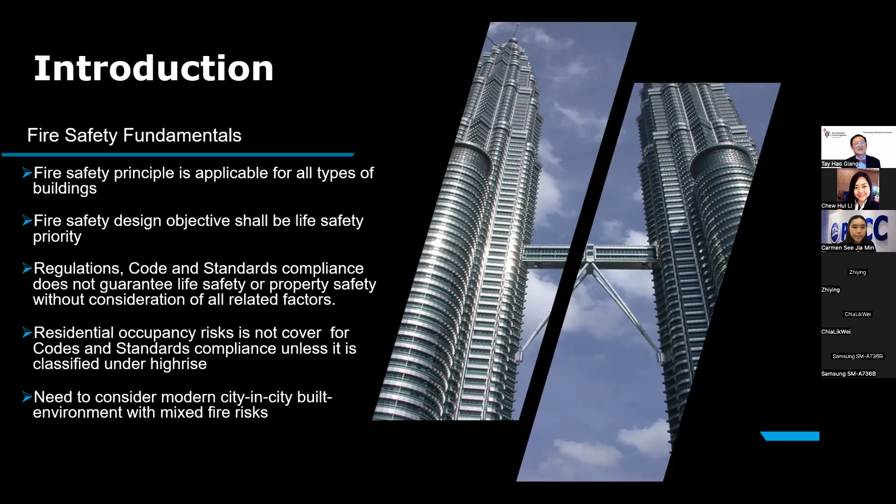Residential occupancy risk is also not covered by codes and standards. And if you look at nowadays, we're building higher and higher residential buildings, especially condominiums or apartments of 20, 30, or even 40 stories now due to land costs. Imagine if all these occupants were children and senior citizens asked to evacuate high-rise buildings. What are the implications? We also need to consider the modern city-in-city built environment, because there are different fire risks and fire hazards. And we have already experienced within Klang Valley many incidents whereby gas leakage in the eatery area caused explosions that affected the shopping mall.

Prescriptive design is what we have been following for decades, but not necessarily the best design, because nowadays we also have performance-based design for modern high-rise buildings and mega-sized shopping complexes. We are also looking at very huge transport hubs like our airports. What about sports complexes and what they call public assembly and worship places, like mosques and churches?

Prescriptive design is deemed-to-satisfy design parameters, which means that if you follow the codes and standards, the building you design is safe. But a lot of fire incidents around the world have proven that that is not the case.

One reason is that a lot of these codes, standards and regulations were written and established probably about 80 years ago. At that point in time, there were no high-rise buildings, our population was not so dense, and the risk and hazard was not as much as today, because we are dealing with a lot of synthetic materials that have higher combustibility and burn ferociously, creating fire propagation at a speed never seen before, especially plastics.

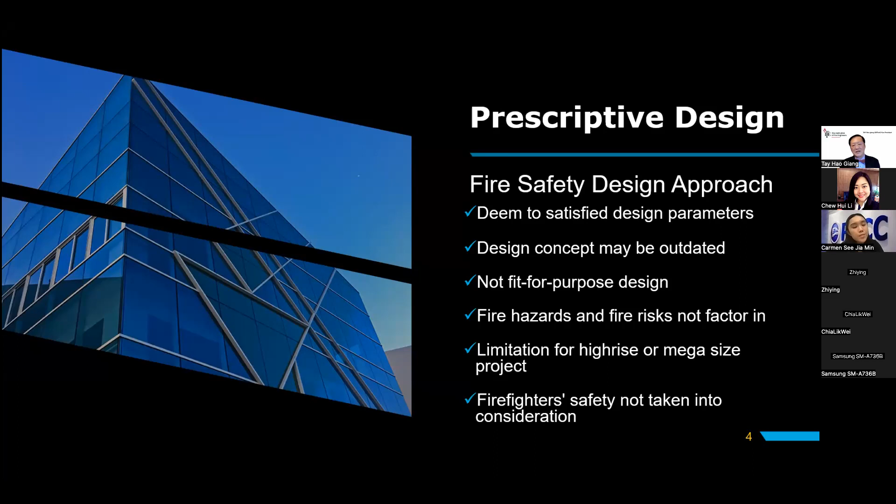And there are limitations for high-rise or mega-size projects. Our building regulations are not catering for extra travel distance or extra height. Plus, building regulations also do not cover firefighter safety. Imagine, when a building is on fire, all the occupants will be evacuating. But who actually spends hours in the building? The firefighters who are entering. So are we protecting the lives of firefighters while they are trying to save our lives and property?

Because a lot of assumptions and personal opinions have been taken into designing or assessing whether a building is safe or not. This particular building is an old building. Of course, at that point in time, regulations were not properly established yet, but still, we cannot excuse why adequate or appropriate fire safety measures were not subsequently introduced.

This building is situated in a very prestigious area within London, very near to Princess Diana's Kensington Palace. As the building is very old, the local council decided to refurbish it. They spent something like £16 million, but ended up spending nothing on refurbishing the fire protection system. Fully non-sprinkler protected, no fire detection and alarm system, and the passive protection is grossly inadequate.

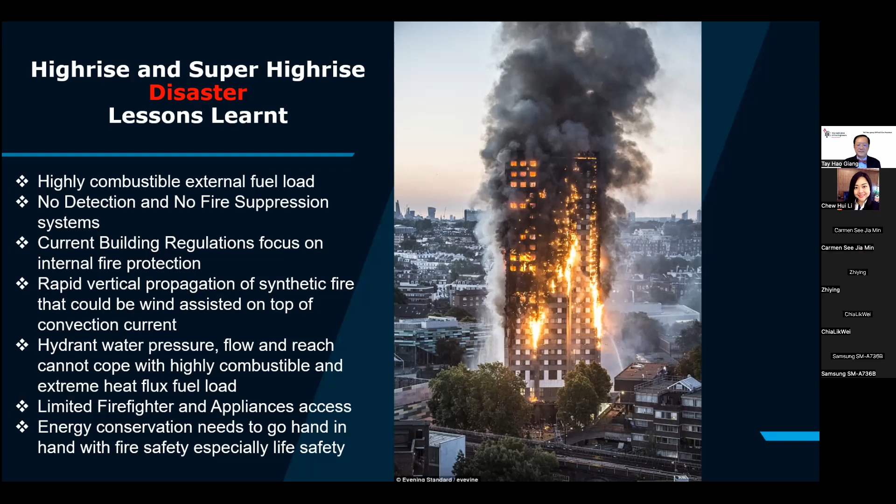Everything else within the building was fully burned, despite the building being equipped or renovated with double glazed windows. Double glazed windows have proper insulation properties, and you can imagine the ferocity of the fire caused by the external cladding. You see, when we talk about green, I always stress that green must be truly green. If it burns, it becomes brown.

Now, what happened in the Grenfell Tower disaster, as well as a lot of other high-rise buildings in Dubai, is that they go for green. So in the UK, they try to save energy by using insulation materials on external cladding, up to 6 inches of polyethylene foam. They are light, cheap, and easy to install, but when the fire started, it burns like a torch.

In Dubai, it's just the opposite. Because the weather outside is so hot, they use high insulation material to reduce the air conditioning bill. And there are so many high-rise fires in Dubai, even until today. There was another one yesterday, all right? So you can see that everything inside the apartment is burned. Nothing is left behind except concrete or brick or metal. You can imagine the ferocity of the fire.

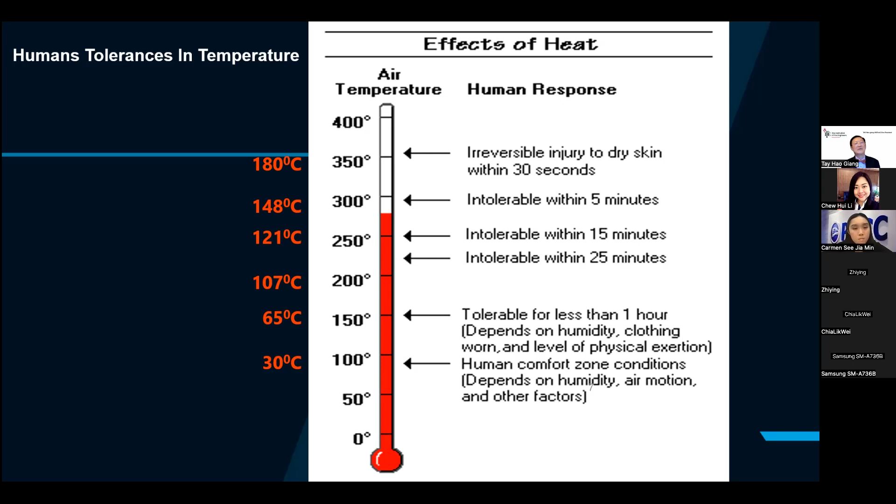But the question is, what is the temperature of normal fire incidents? It can range between 400, 500, all the way to 1,200 degrees C. If you happen to be in a fire of 1,000 degrees C, you will disintegrate and disappear, evaporated. You'll be declared missing in action.

Again, both of these were caused by external highly combustible cladding. All right, so around the world, so many cities make the same mistake, going for green, and at the end have to pay a very hefty price.

Now, when this Address Hotel fire happened, it was such a coincidence that it happened on New Year's Eve. Normally tourists flock into Dubai on New Year's Eve because Dubai always has a firework display that attracts a lot of tourists. But on that New Year's Eve, all the tourists got two shows, one live show and a firework show. My friend, who was a fire chief at that point of time, told me it was hell, you know, because he had to deal with evacuating the residents as well as controlling the crowd.

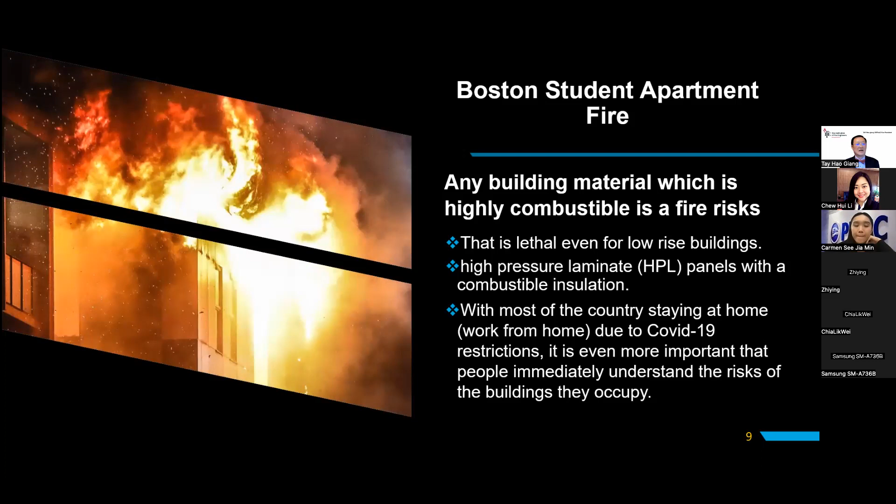When you see a fire incident, what do you do? Instead of evacuating, everybody moves towards the fire, tries to take photos and videos, and they go viral on social media. So you see, if we do not take human behavior into consideration, you cannot claim that you designed a building safely, even though your fire detection alarm system complies with codes and standards. All right. Fire, again, if you look at the color, I don't have to tell you. It's ferocious.

So whenever you have a fire, the fire could break through this particular gap and then spread. And worst of all, it is now guided by the glass panel, and then many of the floors above will be affected as well.

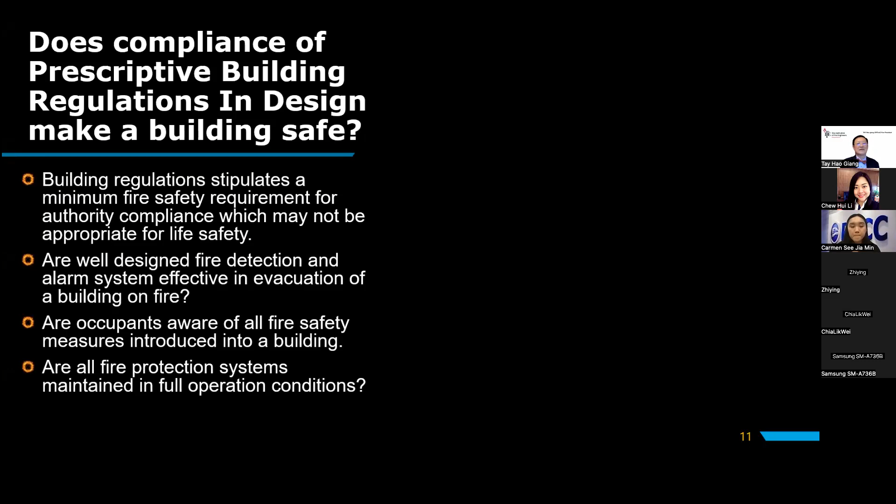So building regulations stipulate a minimum fire safety requirement for authority compliance. And that is where a lot of designers base their fire safety norm on, which again, I think you have to assess the occupancy risk of the building, what it is used for, and how many people are going in.

For example, my friend, an engineer, told me, wow, this building, 6 stories, I designed everything according to codes, standards and regulations. I said, are you sure it's safe? He said, yes. I said, but I don't think occupants can evacuate. He said, why? I said, you designed the alarm bell, but this is the headquarters for the association for the deaf. You have the alarm bell, but deaf people can't hear. So is it safe? So you see, there are a lot of considerations to look at the eventual application of the building against what is being designed.

All right. Prescriptive code, I'm not saying that you can't use it. Yes, but we cannot stop at what is listed inside that document. A well-designed fire detection alarm system is effective in the evacuation of a building on fire. I can talk about this for probably the whole day. This is a very, very important topic, because this is the first line of defense in any building.

The system must be able to pick up fire at the earliest stage and then raise the alarm to make sure that people evacuate. If it fails in its purpose, then you know that we're going to have a problem. But there's more to it, because you've got to actually incorporate acoustic engineering. You've got to understand, because you're looking at sound traveling through the air, entering a human, using the ear to detect the sound pressure level. I won't go into that because I've got no time for it today, but perhaps in future.

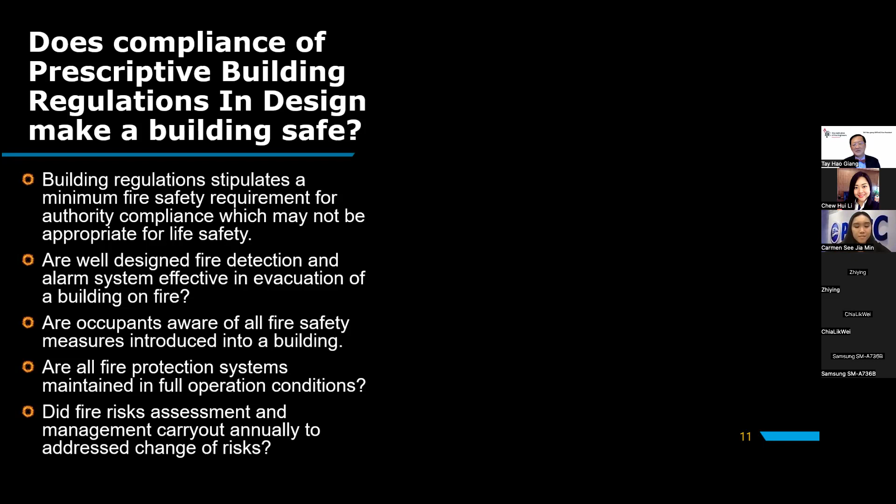And yet we are building taller and taller buildings. Look at all these tall buildings. I was taken on a technical tour of this particular building all the way to the top, and I tell you, they have quite good preventive measures. They even have mechanical floors whereby the water tank can be used to flood the floors below if the fire gets out of control. This is 452 meters. Let me ask all of you a question. 452 is about 160 floors. Can you walk the staircase down in one go during a fire drill? You can't.

So you see again, human behavior and human physical limits are not taken into consideration. Except in Malaysia, we are very proud because the Petronas Twin Towers happen to have a sky bridge linking the two towers at only 41 floors. Tower 2 is on the left. If a fire happens on the lower levels, up to the 41st floor, everybody will be asked to go into the staircase and evacuate. But from the 41st floor onwards, everyone will be asked to come down to the sky bridge if the fire is confirmed, cross over, and be taken down by high-speed lift. So it's mechanically assisted evacuation. But how many commercial buildings actually go deep into establishing ERP, ERM, and ERT?

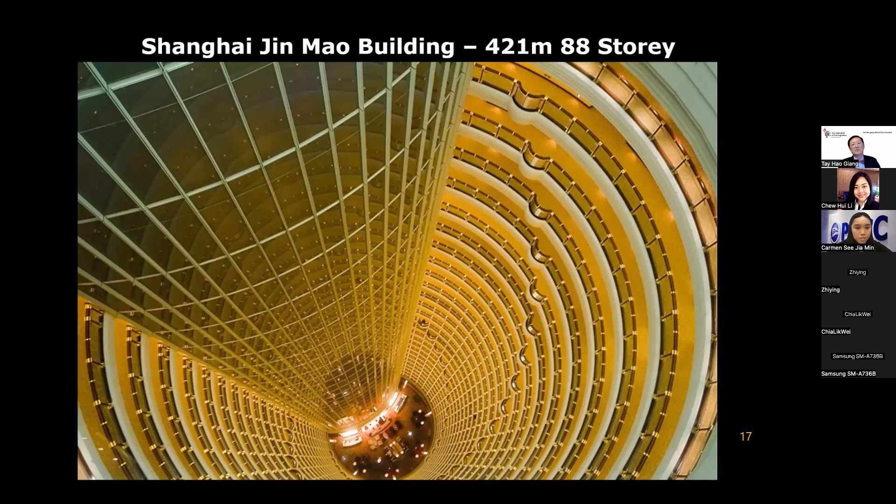Look at the hotel. This is on the upper part of Jin Mao building, and you can see that internally it's actually empty. The bubble lift going from, I think, 46th floor all the way up. So if you have a fire in one of the rooms, I'm quite sure the smoke, everything will be spilling upwards.

Taipei 101. When I was taken up this building for a visit, I actually asked a question to the Taipei Fire Rescue Chief. I said, Taipei is famous for tremors. Why are you building so high? And then, of course, the consultant explained that this building is very stable. The upper part consists of 8 boxes with a narrow base that sit on top of each other. And at the base, it's trapezoidal, so the base is broadened, and the structure is actually double design compared to normal buildings.

Speed is very high. And what surprised me is that normally for high-rise buildings against tremors, they will have 2 water tanks on the top transferring water during the earthquake, to prevent oscillating of the building resulting in collapse. But in Taipei 101, instead of the water tank, they designed a steel ball 30 feet in diameter that acts as a pendulum.

This is another building in Dubai, 829.84 meters. This is the tallest at the moment, but in probably 3 years' time, it'll be replaced by a 1 kilometer building in Saudi. But the question I'm asking is, why are we going higher and higher? What is the objective? You spend billions of dollars, and at the top the usable area is very limited. Except that it's good for filming Mission Impossible movies. I was taken all the way to the observation deck, 600 meters, and everything looks so small, like ants, and those are all high-rise buildings.

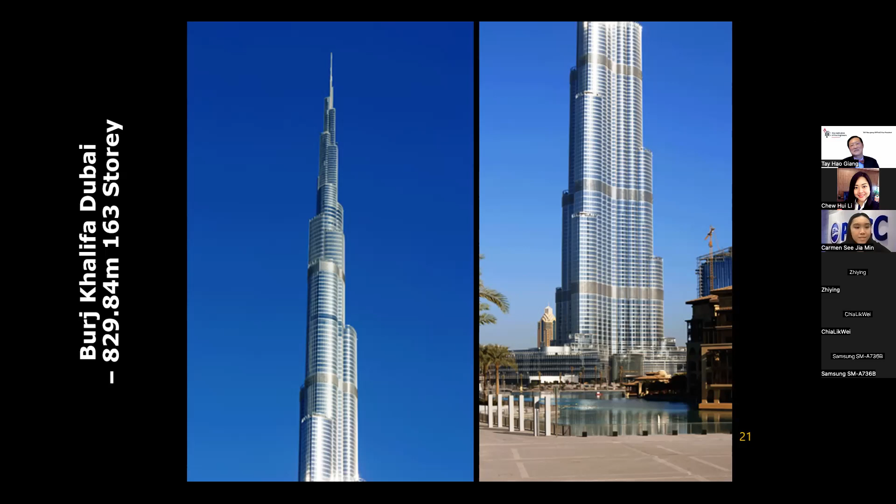It's actually beautiful. The Address hotel I showed you is directly opposite Burj Khalifa. And below that, they have the 2nd largest shopping mall in the world. If you want to go in there, make sure you have a way out, because everywhere is like a maze. Pavilion and Mid Valley are nothing compared to it. And everywhere looks the same. I also did a risk assessment, and I could hardly find any exit sign. They don't have keluar, they use EXIT. I could hardly find exit signs.

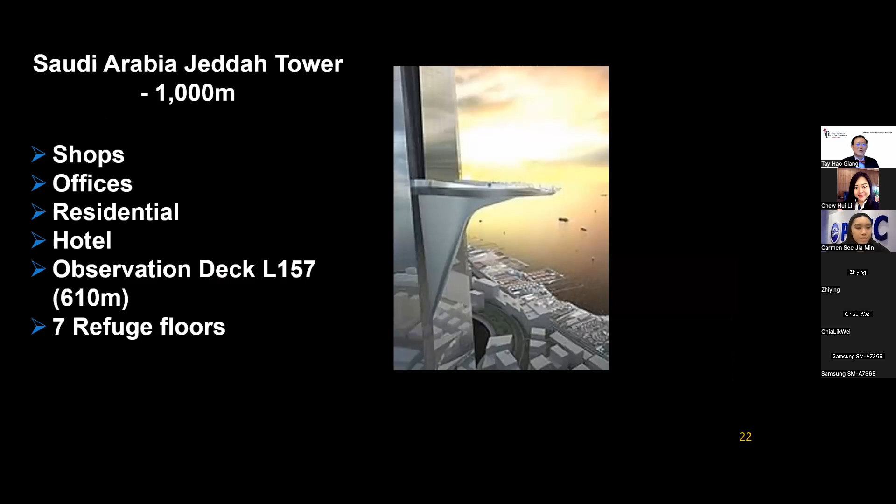It's really scary. This is a one kilometer building proposed. I don't know whether it's going to be continued. I rest my argument of why they are competing with each other. Fine, but what is the objective? Fire safety engineering design should be adopted. All right. You look at fire safety principles.

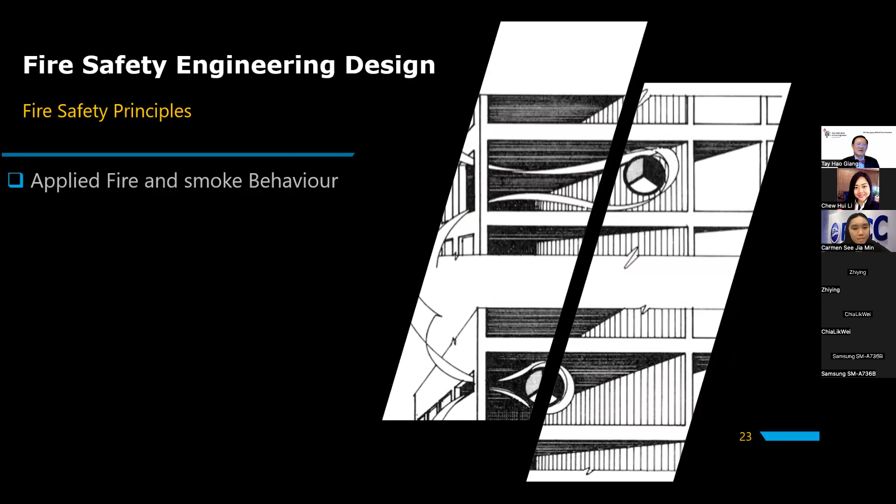You look at applied fire and smoke behavior, human behavior, proper compartmentation. That means you really need fire stopping, not the make-do fire stopping by a lot of developers who want to save money. So for a big floor opening, they use cement and sand mortar to cast it until a small slot. That is not proper. Fire will still break through. So you need a proper fire stopping system tested by laboratories for compartmentation.

And you need performance-based design, which means that at times you also need computer modeling. And it must be verified. All computer modeling must be verified, not just used to generate reports.

Evacuation, I think, is very important. As I pointed out, at the moment we are still using a single evacuation speed of 1.12 meters per second. I always joke that if you were to use that, you're assuming that all Malaysians are 20 years old with the same leg length to be able to achieve the speed, all right? But then we have so many different kinds of people. And we have to balance security and safety.

Many hotels in Malaysia actually remove the lockset handle when you enter the staircase, which means that once you go in, it's one way down. You cannot re-enter the building, which is a high risk. Because if you enter the staircase and there's no way of going back into the building several floors down, when you see smoke coming up, you'll be trapped. And this is against our building regulation.

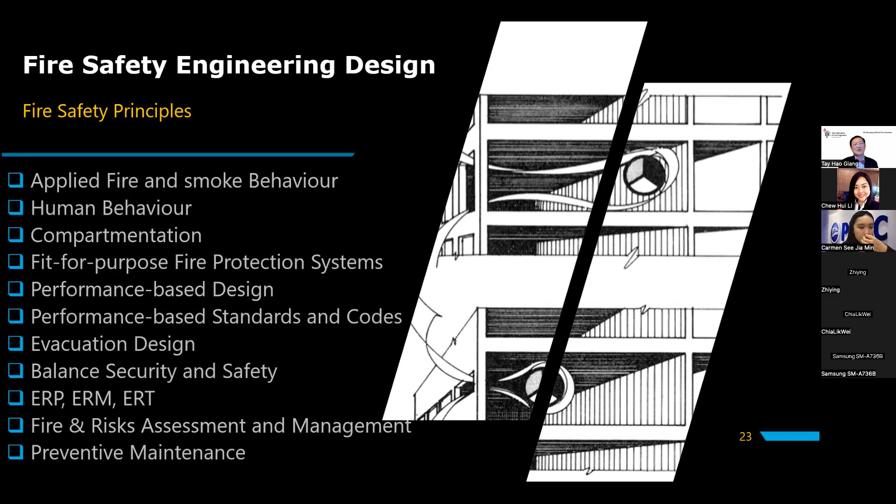Then, of course, fire risk management and assessment is now a necessity, no more a luxury. All right, because a lot of people thought they can claim insurance, but insurance also has a lot of exclusion clauses, and you need preventive maintenance. These are fire stoppings, where any openings within the wall or the floor inside the building must be properly sealed. All right. At the moment, these are the issues facing the construction industry.

Prescriptive code with no specific fuel load. Interior designers added significant fuel. Fire risk changes with time, maintenance is not done, change of occupancy risk. There are buildings under lease where the turnover of tenants is so high. I saw an office building with 3 floors leased out to a telco company, where they brought in tons and tons of communication cables. This added a lot of fuel load the building was not designed for. So if the original building has a sprinkler system, it cannot actually protect the building.

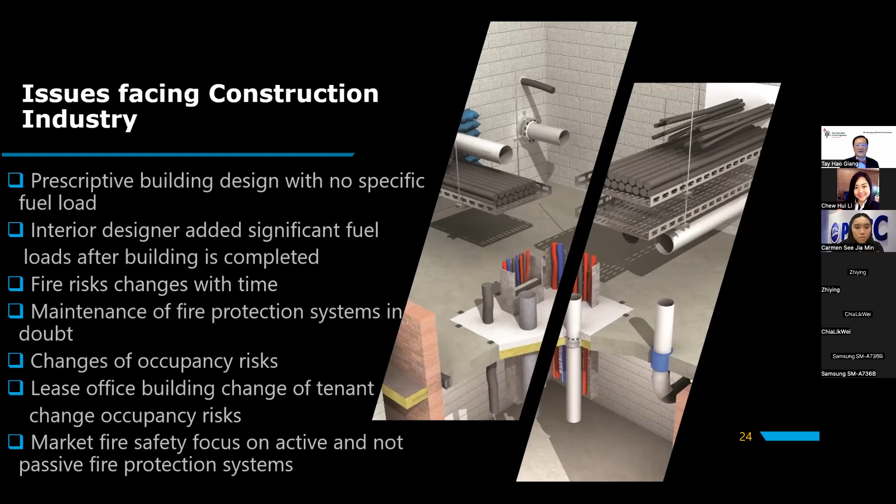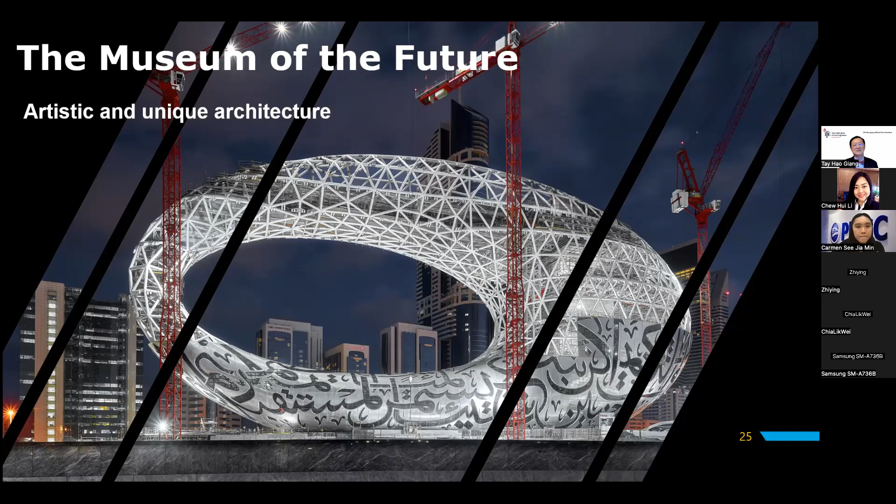Look at this beautiful structure. It's in Dubai. It's the Museum of the Future. And I tell you, if you go through the entire paper about how it was designed and constructed, you'll be amazed. All right. They use very advanced aviation skins to construct the exterior of the building. When I was there, it was under construction, and this is a photo I've taken myself. That is beautiful. All right. There is actually a YouTube video. You can go and take a look.

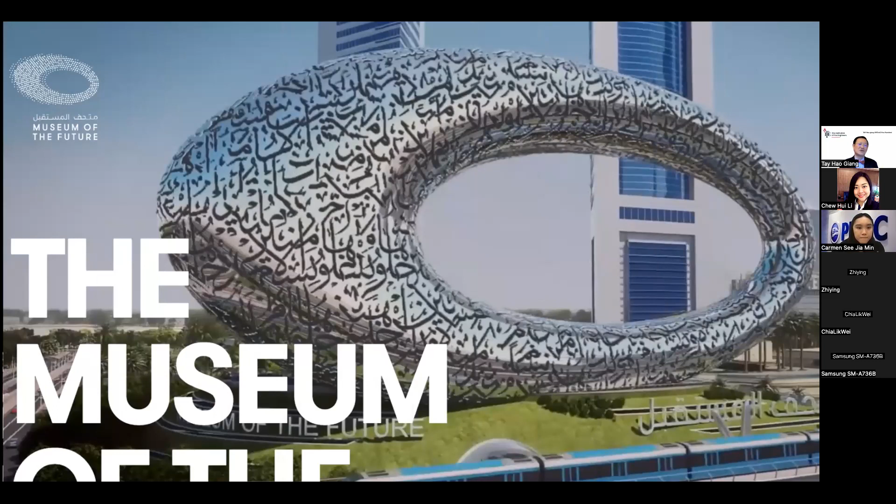Singapore Marina Bay Sands actually adopted a performance-based approach, and you can see that there are requirements stated in the bylaw that are being omitted. For example, they have a very high atrium, so sprinklers can't operate. So there's no sprinkler in the atrium, and there's no smoke extract system, because it is big enough to serve as a smoke reservoir. With a smoke reservoir, as long as you can provide clear smoke height for occupants to evacuate, you can deal with the smoke accumulation later on. Arup is the designer for the M&E, and I'm quite impressed with the way they adopted performance-based design.

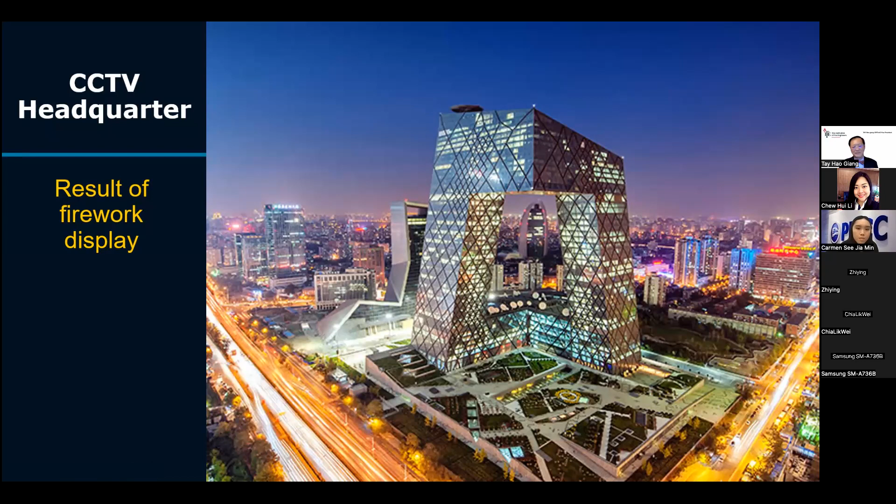This is the CCTV headquarters in Beijing. This is one of the building designs that achieved an award. You can see that it's designed like a door, the Mandarin character for door. And they also have the head office here, all right? And this head office, once completed, before it came into operation, they actually allowed it to be used for a firework display during Chinese New Year's Eve.

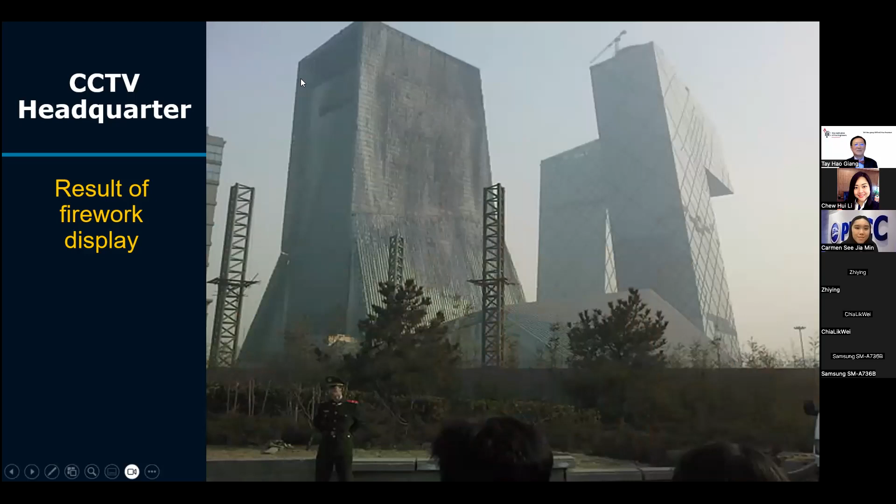And because there were no proper safety protocols, you can see that eventually the whole building was burned. The contractor is very happy. We get two projects' cost instead of one. Imagine. And inside here, it also houses a 6-star hotel.

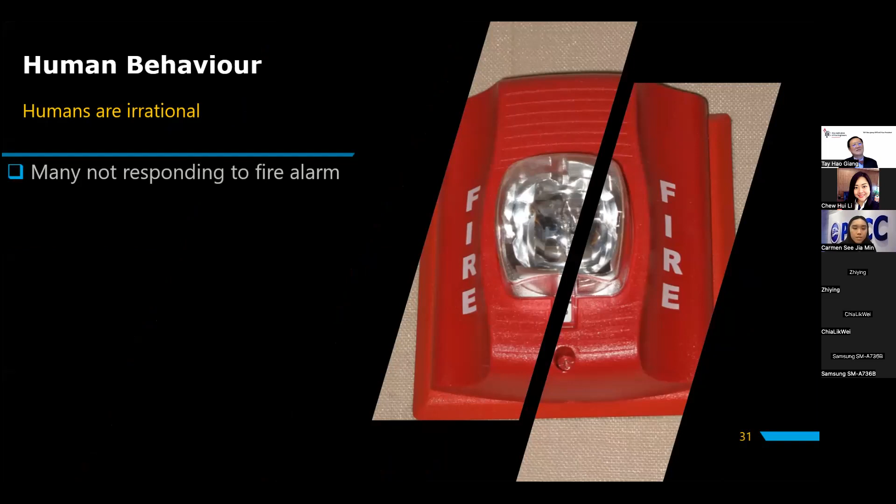Okay, let's look at human behavior. Humans are irrational, and worldwide statistics point out that not many of them respond to fire alarms. Egress speed differs for different age groups, yet up to now, architects still use one standard speed. So what does it mean? Is it realistic, or does it just fulfill the type of calculation that gets the approval from the

authority? And normally, if you ask people, if they don't see fire or smoke, the assumption is there's no fire. That is very dangerous, all right? Because nowadays smoke propagation is so fast. And not only do smoke particles carry high temperature, they also come with toxic fumes that kill.

If you look at the Twin Tower 9/11 disaster, there's a couple that was evacuating halfway, and then the message came in saying that the fire incident is under investigation. So the wife told the husband, darling, you go down first. I think I'd better go and finish my report for the director. So she went back up to the office. And after that, of course, as we all know, the building collapsed.

So my advice is whenever there is a fire alarm, whether you're in a high-rise building, office, or especially in a shopping center, evacuate first. All right? Good exercise. And if nothing happens, you can still go back. But if something really happened, maybe you save your life.

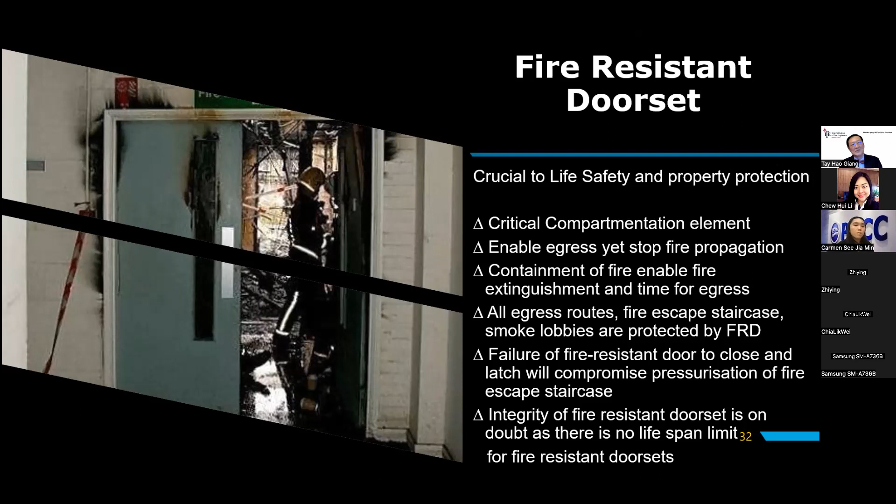If you talk about pressurization in any high-rise fire escape staircase, don't forget that on every floor there's a fire resistant door set. If you do not maintain it, and in Malaysia, as I said, nobody maintains fire doors, if the doors cannot close properly, or if the door is left open, imagine the smoke will get into the fire escape staircase and nobody can escape.

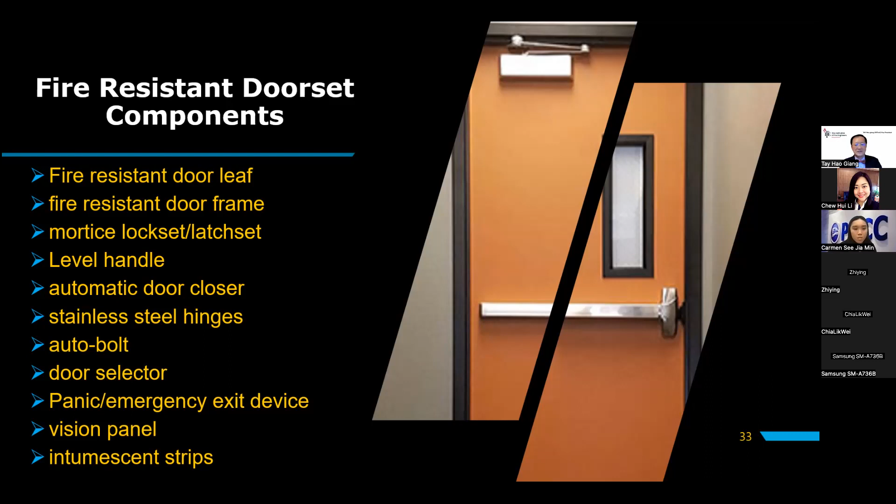And there are a lot of components in the door. You can actually go and take a look at the Malaysian Standard 1073, Part 3, 1996, with Amendment 2003. It's all listed there, all the components. You have the door leaf, your lock set, your door closer, your hinges, auto bolts, door selectors, and all that. Can the fire resistant integrity of a fire door be maintained?

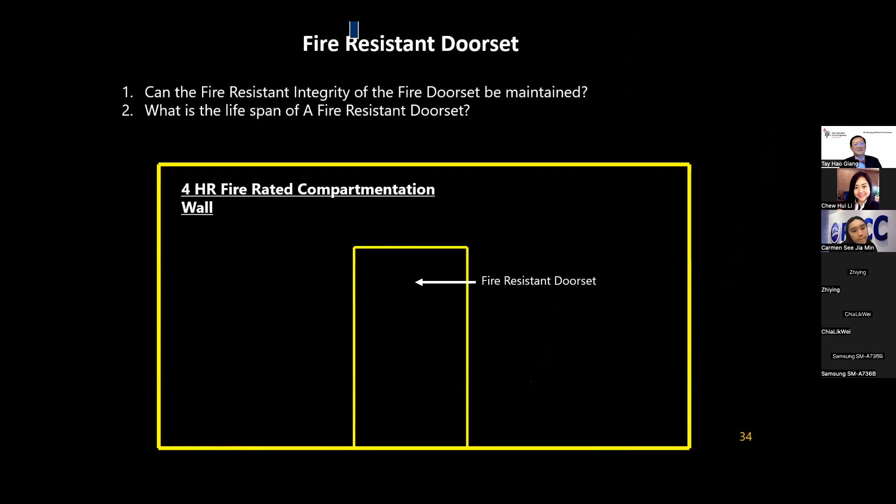That is a $1 million question, all right? Because Malaysian fire resistant door sets are tested to 100,000 cyclic movements. That means we actually test the durability or the performance of a door, and we are the only country in the world. Go and check the rest of the country standards, they don't have it. Malaysia is the only one that tests the performance of the door.

So the question is, with 100,000, how long can the door last? Because the door is the only building element that's subject to wear and tear. If you look at floors, walls, columns, beams, they are static. They can be there for the next 20 years. But doors are actually subject to opening and closing traffic. Sometimes they are abused, you know, when the cleaners come along and bang it with the carts and all that.

So how long can a fire door last? In fact, if you look at Malaysia, there's no deadline or lifeline for doors, and it can be there for the next 30 years. But at the end, we have to really look at it: are they still classified as fire doors? I actually did research together with a student when I was lecturing in UIA. And we found that the 100,000 sometimes only lasts probably about 2 months if the door is used so often, all right?

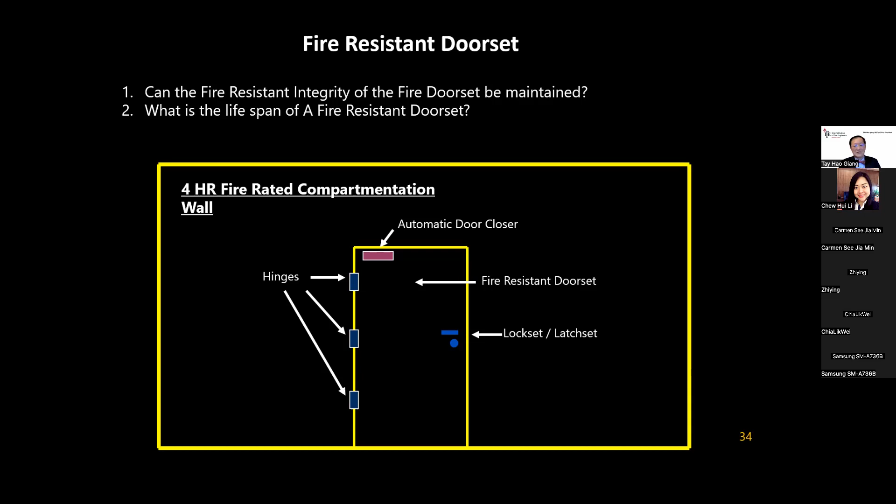100,000 divided by 10 years, assuming the door has a lifespan of 10 years, means that in 1 year the door can only open 10,000 times, right? 100,000 divided by 10, simple arithmetic, 10,000 times. But divide by 365 days, that means every fire door can only open 27.4 times a day. In a shopping complex, one of the doors that we measured goes up to 3,685 a day, opening and closing. You can do the calculation, you know that door can't last 10 years.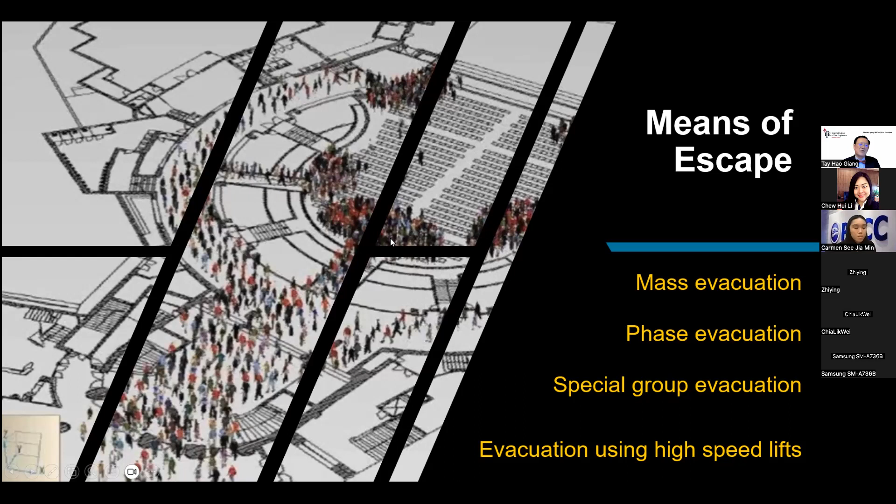Means of escape nowadays: because we are building bigger buildings, mega-sized shopping complexes, the density of the population inside these buildings has increased tremendously. Now, the question is, can we evacuate all these people during a fire incident? If you happen to be in a theater, do you think you can get out, especially those who sit in the middle? If you're sitting on the aisle, you can get out quite fast, but if you're in the middle, what about when everybody accumulates at the limited exit points? There will be a crowd. And would there be a stampede?

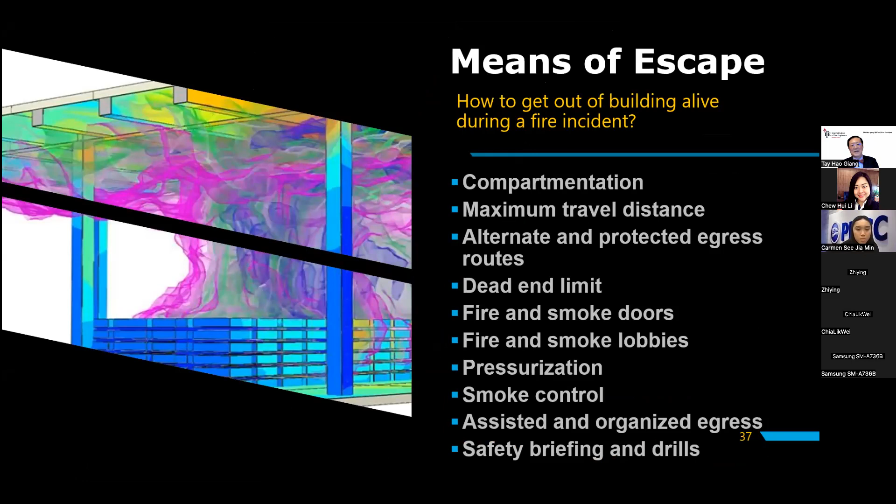So nowadays, for means of escape, there are many areas we have to look at. We have to look at compartmentation so that the fire, when it happens, can be contained inside a room so that there is time for people to evacuate. And what about maximum travel distance? You need alternate and protected egress routes. We will look at the dead end limit and many other systems.

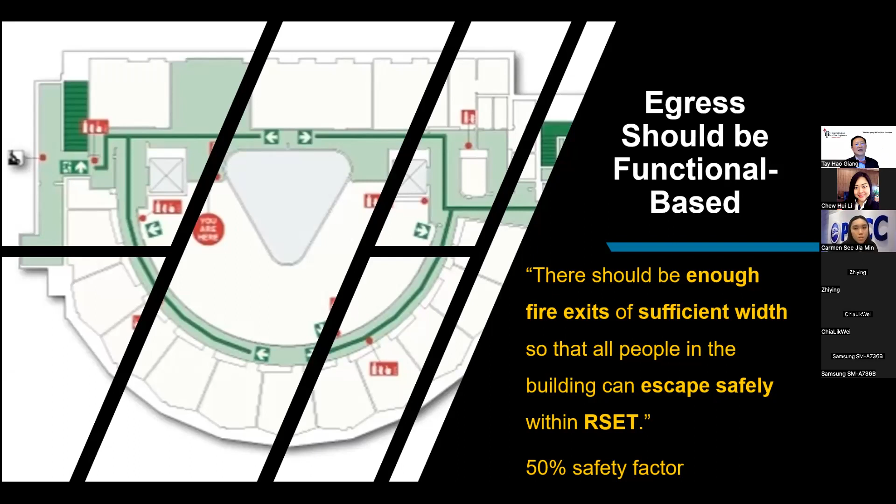This is an area that I have talked about many times: if you look at all these evacuation signboards in any building, they have too much information. You've got no time to read all of it. All you need is to indicate clearly which way to go. And I think this is a modern design that is very fitting. They even tell you the direction. Because all you want is, where should I go to get out of the building during a fire?

In China, they even have permanent exit signs on the floor, permanently illuminated. All right. We always say China is behind the times. Look at their airports, look at their shopping complexes. And make sure that you follow the right arrow, because there are also 70% discount arrows going to shops.

My professional peers are now designing based on the assumption that fire can only happen in one place or one floor at one time. Again, I told them that's wrong, because 25 years ago, there were already cases that happened in Hong Kong. The first case, the fire spread from the 4th all the way to the 14th and 15th floors. And that one killed about 42 people.

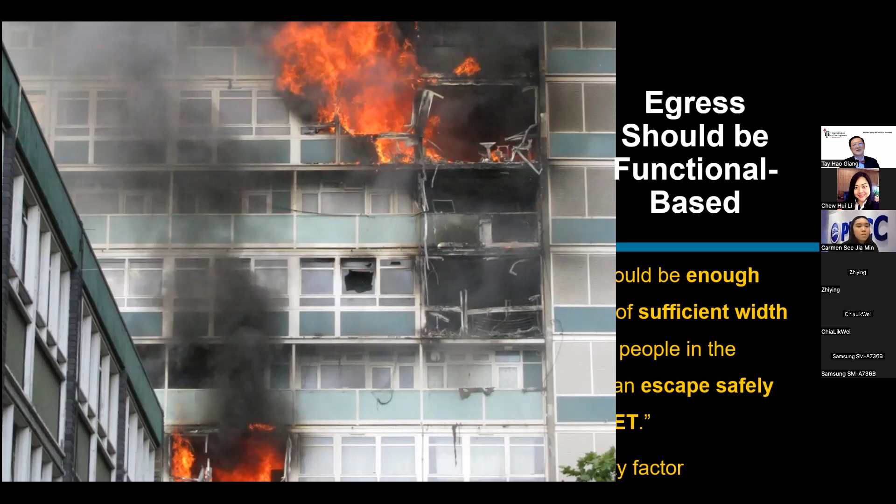This is the Lakanal building in the UK where, actually, you can see the fire spread to the rest of the floors. So there are a lot of reasons why this happens. And so we cannot base on the old wishful thinking of considering fire happening in one place only. Of course, that's the easiest design, right? But the question is, is it fit for purpose?

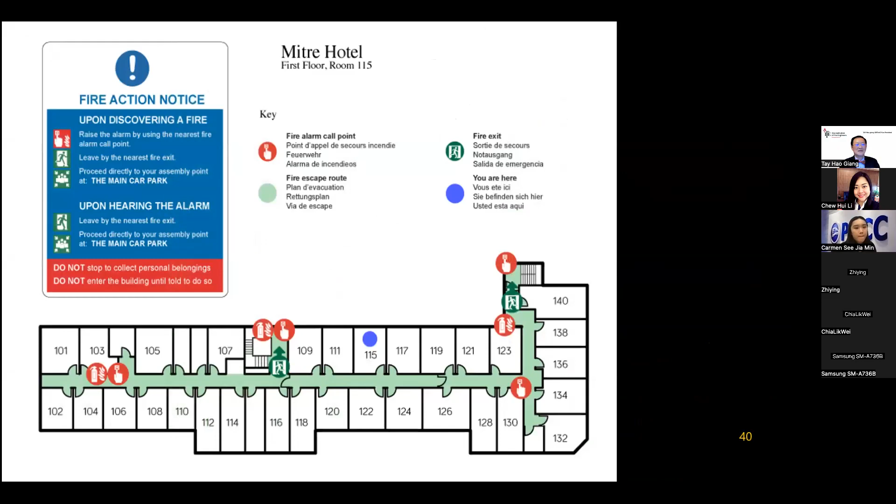These are other modern evacuation signboards, right? You can see that it's all painted green. It's very easy to read. Where you are, blue, right? Now, this is another point I've been raising. We always ask to put the keluar sign on top of the door. During a fire situation, do you think you can see the keluar sign? Actually, it's here, all right? So why are we still putting it up there?

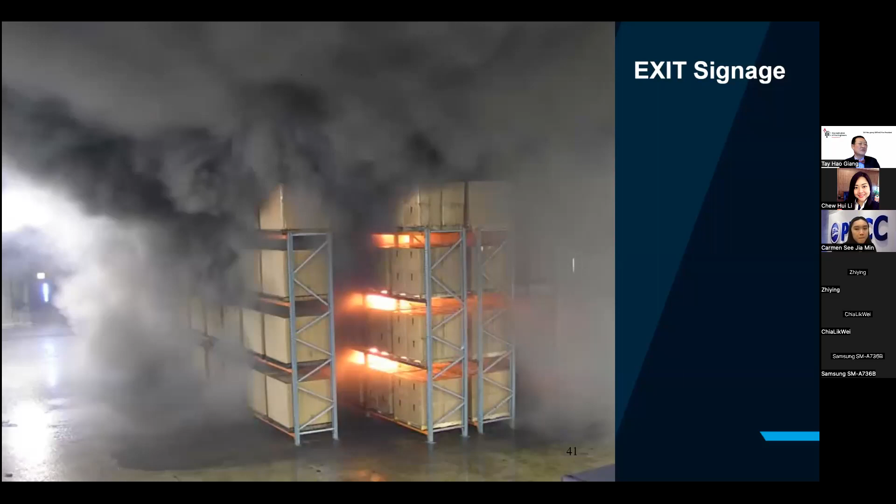Secondly, the signs now are all made of plastic, no more metal casing. Do you think they will still be around? Because with plastic casing, smoke particles carry about 100 to 250 degrees, they will destroy the sign. If you look at Norway, Finland, they are now putting the illuminating sign on the carpet itself. They do not need to put it on the wall.

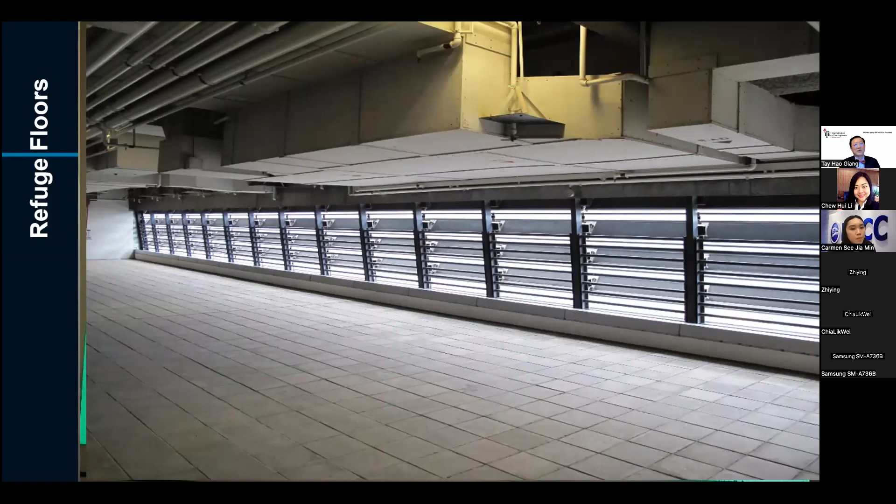These are the refuge floors that I talk about in Hong Kong. In China, Hong Kong, Singapore, if your building exceeds a certain height, you need to actually incorporate refuge floors. Nothing combustible, everything is protected. You can take a rest, but as I say, the problem actually starts because how are you going to deal with all these people who are resting? Let me show you a video.

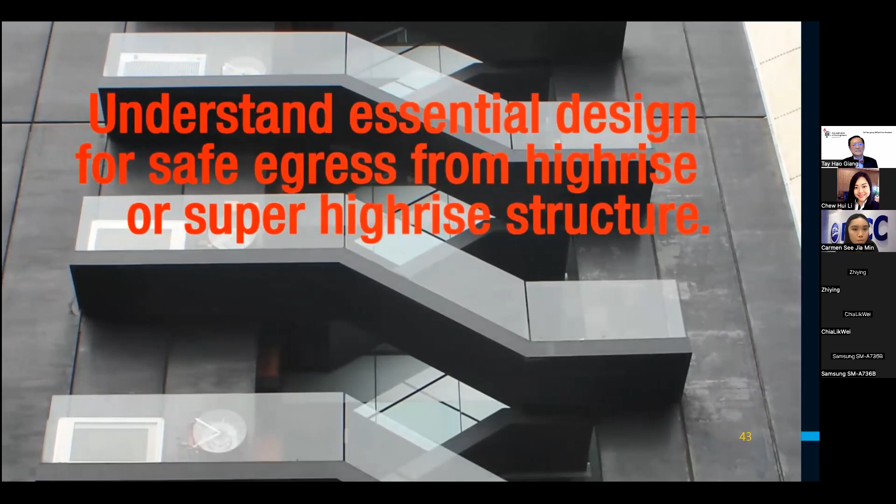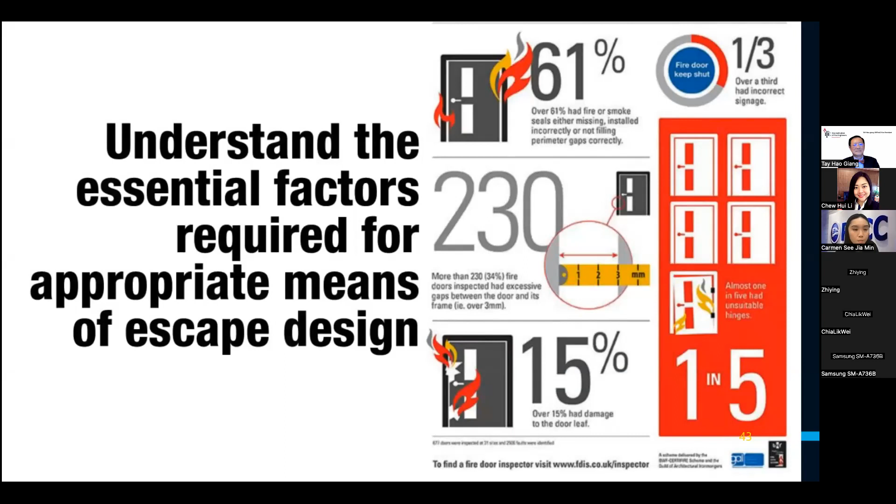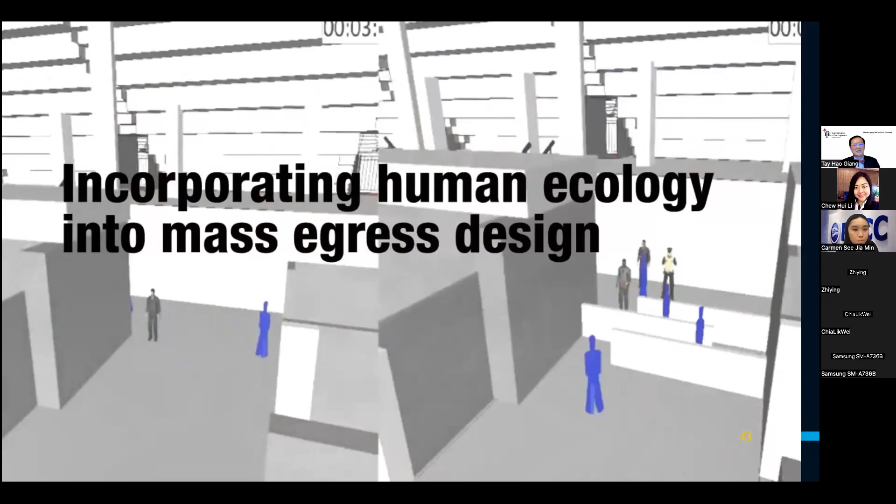Simulation. Please evacuate this building.

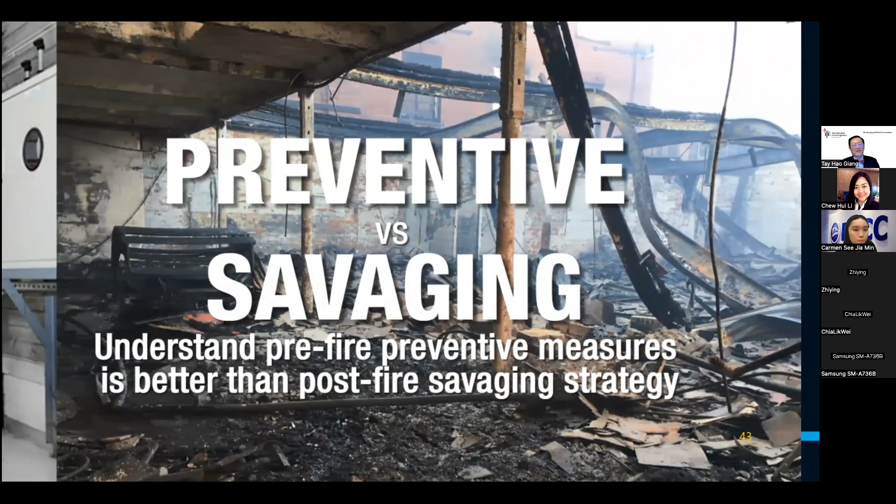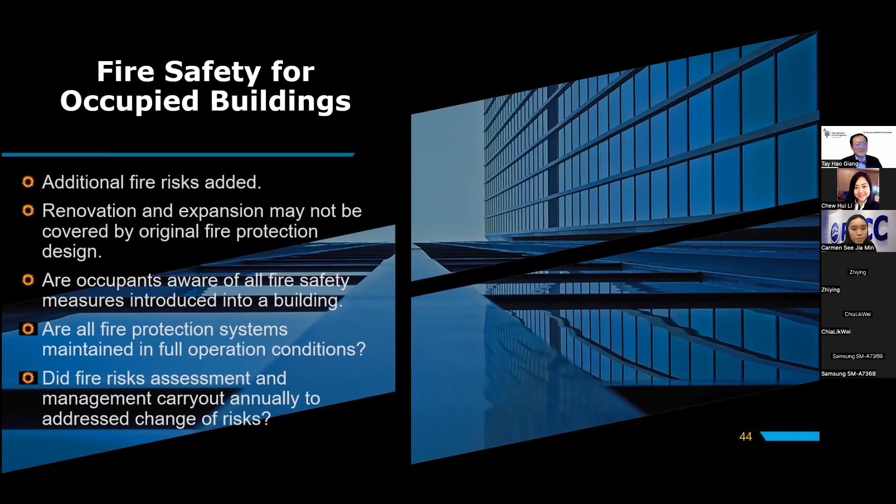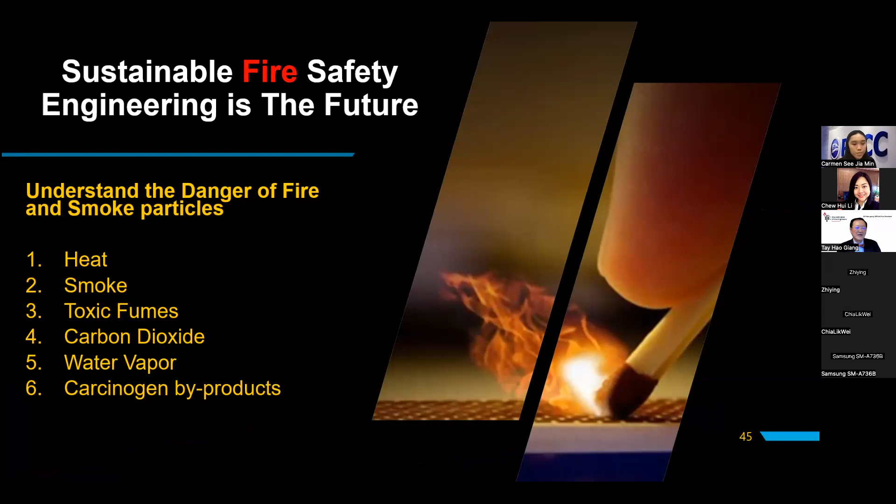Prevention is better than cure, definitely. During a fire, you have fire damage and water damage. So for fire safety for occupied buildings, you have to look into a lot of considerations. I will not run through it. And to sustain fire safety, of course, you can understand the danger of heat, smoke, toxic fumes, carbon dioxide, water vapor. And the last one is the most important because any fire will produce carcinogenic byproducts. Carcinogen means that if you inhale some of these gases, you may then develop cancer in your lungs. All right, that's very important.

For forward-looking, I think we need to review building regulations, codes and standards, and the application of testing methodology, because a lot of the test methods in the lab are already outdated. Fire dynamics combined with egress simulation, I think, is now the in thing. Intelligent fire detection alarm systems linked to mobile apps, because the important thing is that we do not want to just rely on the bell. We need to use the apps more to inform everybody of what is actually happening, who should be evacuating and all that.

5G and AI for accurate sharing of fire size, material data and all that, I think is very important. There's a future that's coming. Face detection for head count, occupancy localization. For intelligent buildings, they are doing it now. Wireless plug and play detectors, MCP. Integrated home intelligence systems for high ambient smoke detection, robotic firefighting systems. There is endless new technology that we can actually incorporate.

The last one is very interesting. An exoskeleton suit to aid firefighters and people with disabilities, like Transformers, is already being looked at by the Singapore Civil Defence Force. So that is all I have to share.